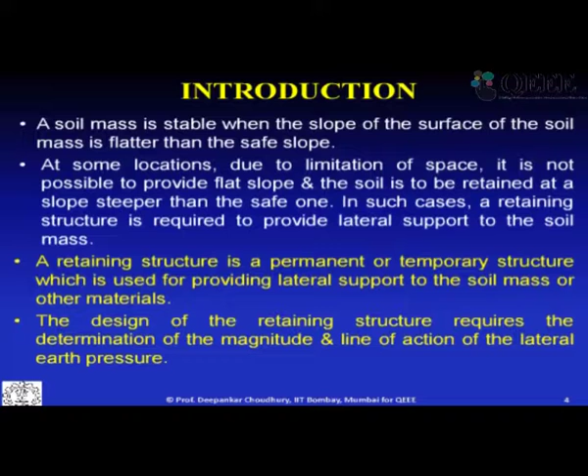Whenever we get a soil mass below the ground, we say that it is stable when the slope of the surface of the soil mass is flatter or shallower than the safe slope of that soil mass. Suppose an existing ground profile, which I am showing now - this is a profile of a ground, this is any depth below the ground, and this is a very shallow slope which I have drawn. Obviously this is a stable profile. Whereas this profile of ground may not be that stable because it is very steep compared to its horizontal inclination.

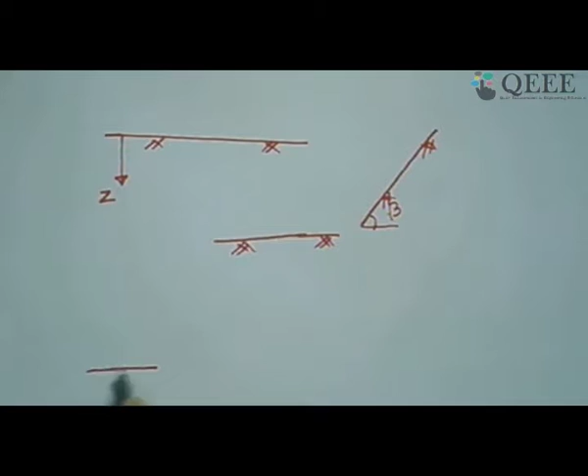So whenever we want to have some kind of level difference in the ground - suppose my ground surface at one side is like this and another side is like this - what we can achieve by means of a slope like this, but this slope has to be stable. This inclination which maintains the two different levels of ground surface has to be stable, provided this angle of inclination is very shallow, or considering the soil properties.

But due to the limitation of available space, in many cases, mainly in urban areas where there is a severe space crunch, we cannot have this much extra space. This is nothing but what we require - an additional space to have the stability of this inclination.

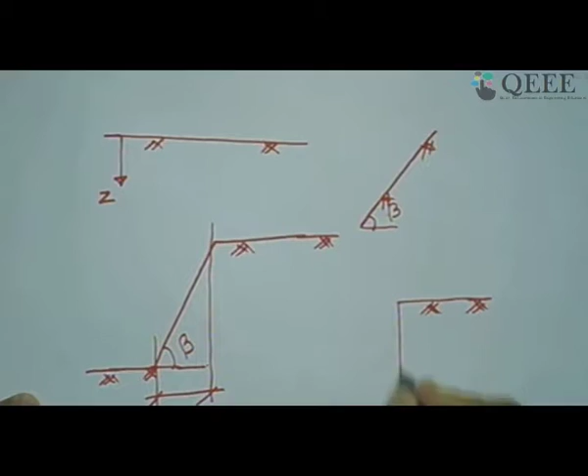So what we can suggest in such a case - suppose we want to maintain the same level height where there is a severe space crunch - to maintain this kind of two level difference of ground surface, we need to provide some kind of supporting system here which maintains the stability of this kind of level difference adjacent to each other. So this is nothing but what we call a retaining structure.

This kind of construction can be of masonry, concrete, or any kind of rigid material. This kind of structure which provides support to maintain a level difference of ground is nothing other than what we can call a retaining structure.

Coming back to this slide, you can see that at some locations, due to limitation of space, it is not possible to provide that flat slope - whatever horizontal extra distance you require is not able to be available or provided at the site. So in such cases, a retaining structure is essential to construct to provide lateral support to that soil mass.

So that is what I have shown just now. A retaining structure can either be a permanent structure to maintain that level difference forever, or it can be a temporary structure - that is, for some temporary reason we want to maintain a level difference, and once the work is done we can probably reduce the level difference, so then the need for the retaining structure is not there. In that case we can call them temporary structures.

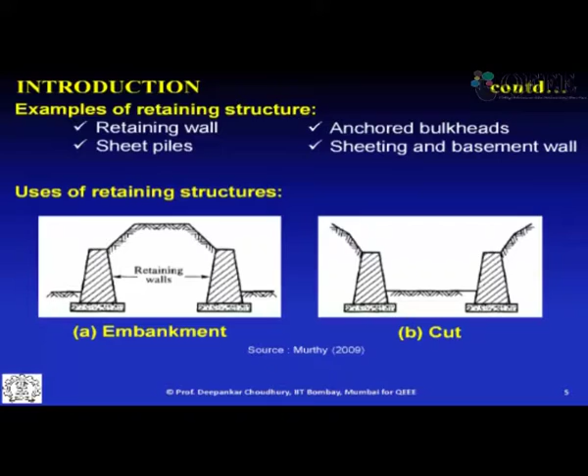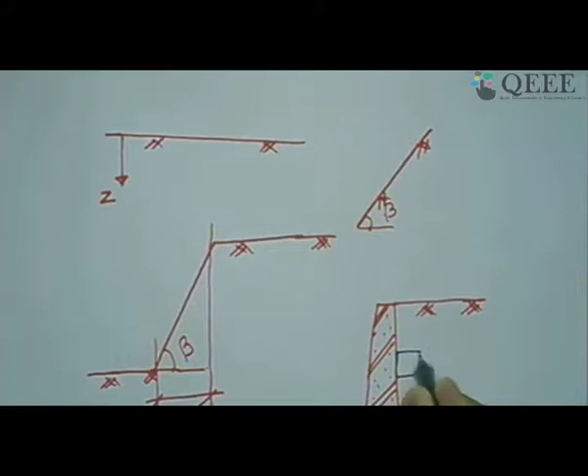Let's see this in the document camera. As I drew earlier, for the lateral earth pressure, if we take any particular soil mass at a depth Z from the ground surface, there is a vertical stress acting on this soil mass, assuming these are principal planes, and some stress in the lateral direction — a horizontal stress, sigma h. This sigma h acts on the soil mass to maintain equilibrium, and in turn acts on the wall, giving a lateral pressure to the wall.

So for this soil mass, taking this soil element, we understand how this causes the lateral earth pressure. Now let's see the different types of lateral earth pressure, this sigma h, depending on the movement of the wall. There are three different types of lateral earth pressure.

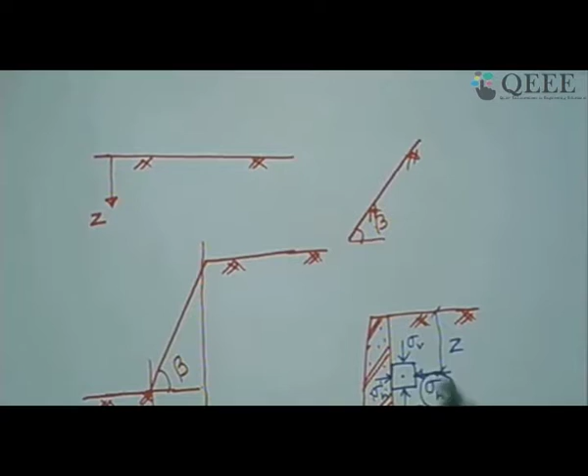One essential comment I would like to maintain here: I am talking about a soil element. So this sigma h, the lateral stress or horizontal principal stress, is because of the soil material, not due to water or any other thing. Whenever we use the terminology earth pressure, we must be sure it is the pressure exerted by the earth or soil, not the water pressure if water is present. In case of dry soil, the total pressure equals earth pressure. But if it is moist soil or the water table is within this layer, the total pressure will be a combination of earth pressure plus water pressure.

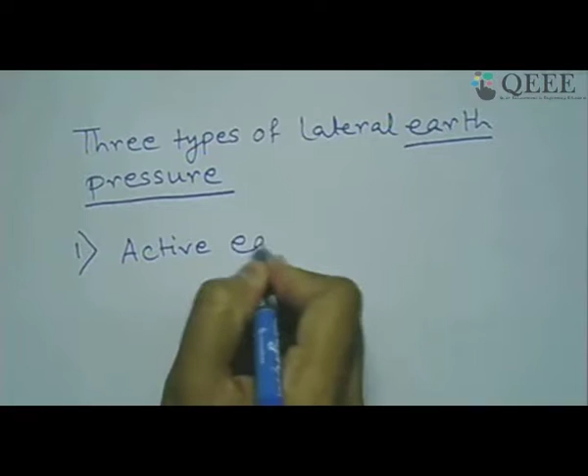So what are the three types of lateral earth pressure? Let us write these down: active earth pressure, the second type is called passive earth pressure. For the case of passive, we also use another nomenclature known as passive earth resistance, I will come to that in a little while. Actually, resistance is a better terminology to use than pressure for the passive earth condition. And the third type of lateral earth pressure is none other than at rest.

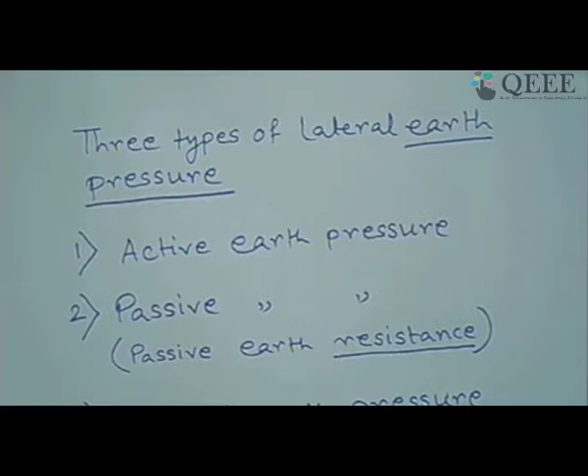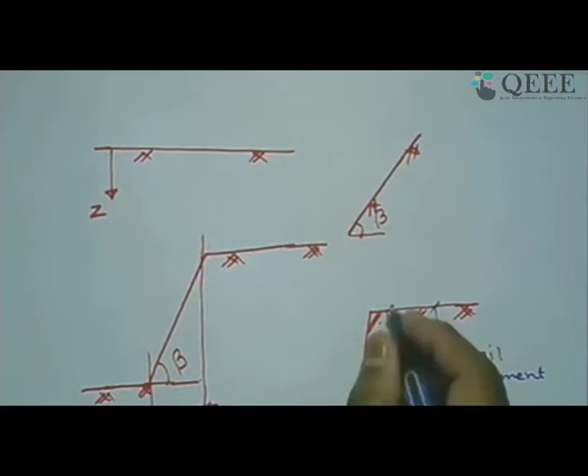So, at rest earth pressure. Now if we start understanding where these different types of earth pressure come from, the term 'at rest' automatically tells us what type of earth pressure it can be. It says the wall is not moving, it is at rest condition, meaning there is no movement, no deflection, no further lateral or rotational movement of this wall. Because of that, whatever lateral stress is coming here is nothing but earth pressure at rest, since the wall is at rest condition.

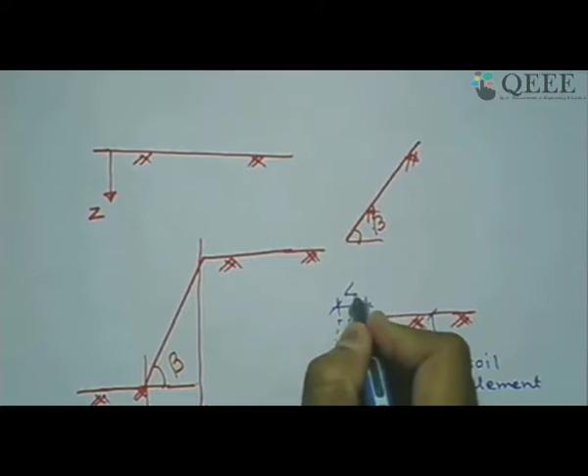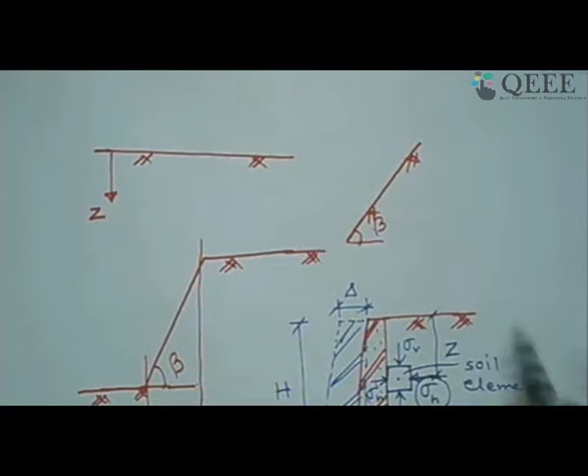Now what is active? How does that active condition come about? Active earth pressure is nothing but, due to this level difference, this side of the earth exerting pressure on the wall. So there is every possibility that the wall may shift towards this side. This is the displaced position, and that deflection or movement, let us say delta. If we say the level difference between the two ground surfaces is capital H, which is also called the height of the wall, then the value of delta by H is very important to know which type of lateral pressure is acting on the wall. As shown, the soil is exerting pressure on the wall, hence it has moved in this direction. This soil is called backfill.

So this condition, where the movement of the wall is in the direction away from the backfill soil, that is called the active state of earth pressure.

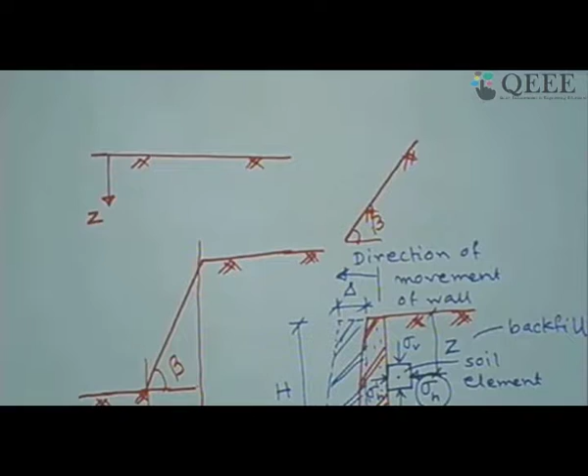Now, if we want to know the fundamental assumptions of any earth pressure theory in general, as in most geotechnical problems, some assumptions are always valid. Here as well, it is true for the theory of earth pressure: soil mass is considered semi-infinite, homogeneous, isotropic, dry, and cohesionless. The classical earth pressure theories of Coulomb and Rankine were proposed for cohesionless soil, mostly sandy backfill material, and for dry conditions. Later these were extended for general cohesive soil also, and moist conditions, but these are the fundamental first assumptions in these theories.

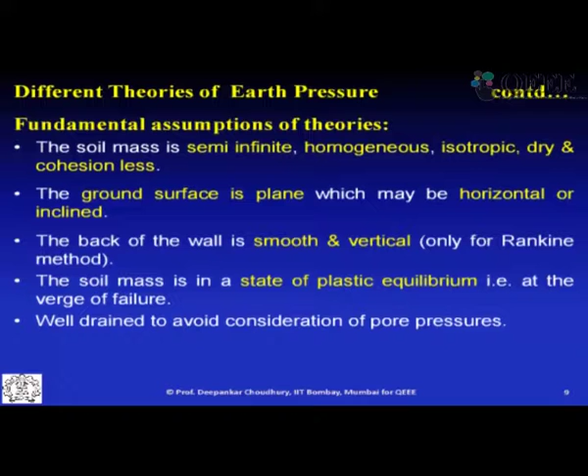As I have already mentioned, there are three different types of earth pressure: at-rest condition of earth pressure is when a retaining wall with a plain vertical face is backfilled with cohesionless soil, and if the wall does not move even after filling the material, then whatever pressure the soil exerts on the wall is known as the at-rest earth pressure acting on the wall.

Whereas for the active state of pressure, if the wall is gradually rotated or moves away from the backfill soil, then the unit pressure acting on the wall gradually gets reduced. So in the active state of earth pressure, the pressure the soil initially gives on the wall slowly gets reduced. Why does it get reduced? It is quite obvious from the picture shown earlier.

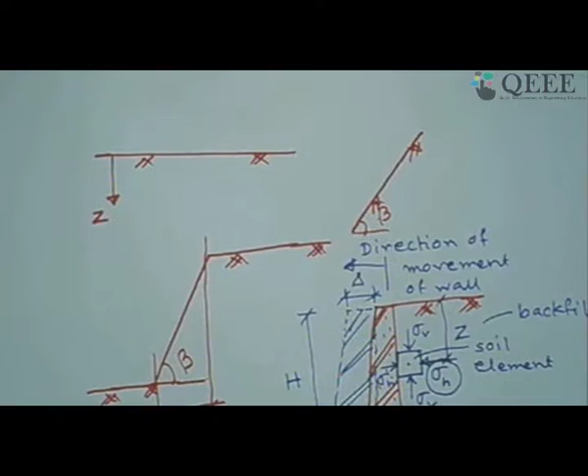You can see, initially when the wall was at this position shown in red, the soil laterally was giving a certain amount of pressure. Now when, due to that pressure, the wall has moved away from the backfill soil, then to maintain equilibrium this pressure slowly reduces till it reaches its verge of failure state, or the plastic state, which we have termed the active state.

Whereas for passive earth pressure, we should more correctly call it passive earth resistance. This is the situation, already explained, when the wall moves out from the backfill side — it can be lateral, rotational, or a combination of these two — and it reduces the lateral pressure, subsequently reaching a minimum possible value acting on the wall, which is our active state of earth pressure.

But in some cases, the wall moves towards the backfill — now the wall is putting extra pressure on the soil. It can again be rotation, lateral deformation, or a combination of these two. In that case, whatever pressure is coming from the soil side, we call passive earth pressure, or better, passive earth resistance, because this is the resistance provided by the soil to the wall. That's why passive earth resistance is a better terminology.

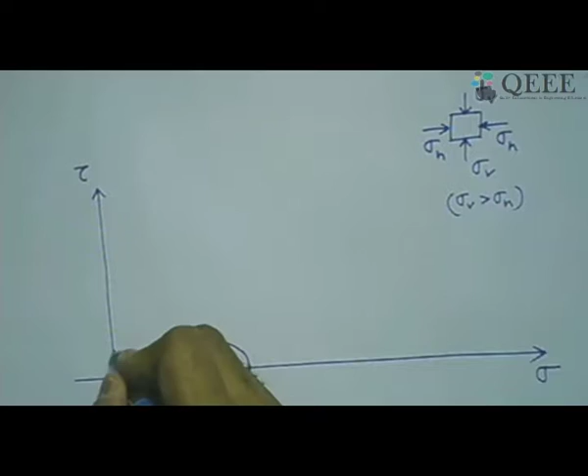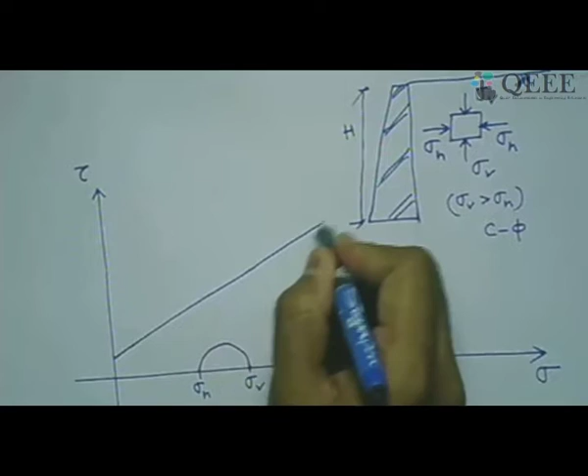Remember, if it is a C-phi soil, that is if the soil media below the ground surface, for this height of wall, if there is no movement of the wall, I can draw this sigma v and sigma h, and if this is a C-phi soil, meaning cohesive and frictional soil, then the Mohr-Coulomb failure envelope I can draw like this, which is C and phi, as we all know.

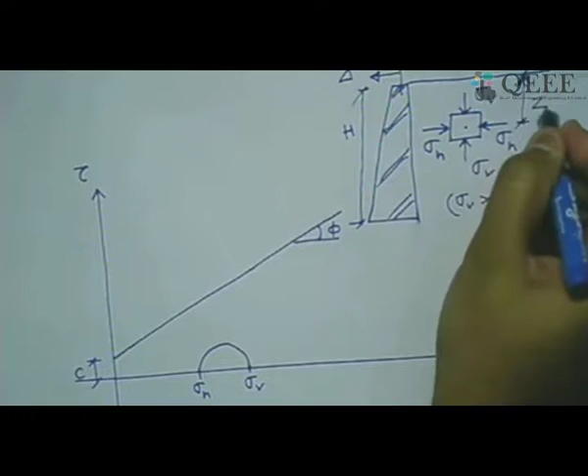So what will happen in this case? Now the wall started moving away, in this direction by some delta amount. So this sigma h has to reduce because you are releasing the pressure by movement of the wall. But sigma v, is there any change to that? No, because this is vertical stress at any depth z, that remains unaltered. There is no change in the value of sigma v. So this point remains same, but sigma h keeps on reducing as the wall moves away from the backfill.

So because of that, if we keep drawing the various states, till which value can this sigma h reduce? Until it touches this Mohr-Coulomb failure envelope. That means when it touches this one, whatever value we get here for sigma h, that is nothing but our active state of earth pressure.

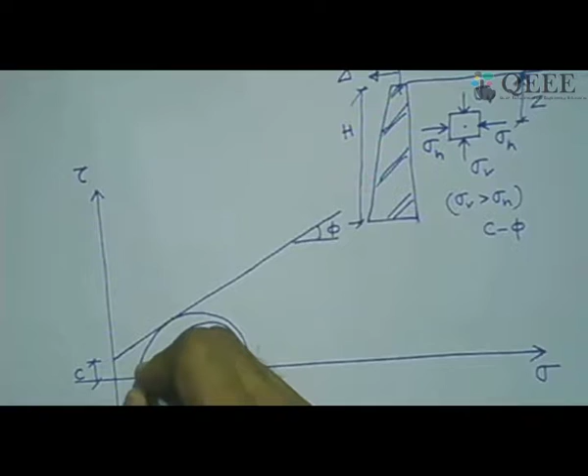So I can mention it as sigma a. That is nothing but what we have mentioned as it goes to the plastic state of equilibrium. So this is my active state of earth pressure, the lateral pressure, and this is my vertical stress. Now for this active state, if I want to find out the inclination of the failure plane with respect to the various directions, what will we get?

So this point on the failure envelope I can connect with these two ends. Whatever is the angle here, that will essentially give me the inclination of the failure plane with respect to the horizontal. Why will it give me that? Because as we all know from the concept of Mohr circle, first we have to identify the pole of the Mohr circle. Then any change of stress, finding the direction, planes, everything should be with respect to the pole.

So if we want to find out the pole for this active state, let's see how to find it. Sigma v is acting on a horizontal plane, so we should draw a horizontal line through sigma v, and sigma h is acting on a vertical plane, so we should draw a vertical line for that sigma h. Wherever these two planes meet, that is nothing but the pole of the Mohr circle. In this case, this point A is our pole.

So that's why if you find the angle alpha from this pole with respect to the failure envelope, with respect to horizontal, that alpha value gives us the inclination of the failure plane. Now how much is the value of this alpha? I will calculate that a little later.

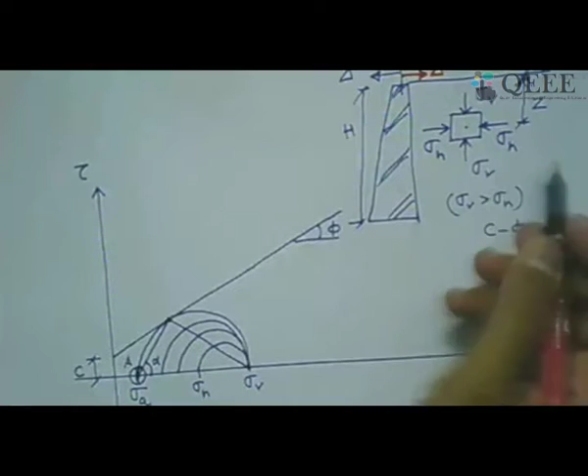Now let us understand the other state of movement of the wall. In the second state, suppose the wall starts moving in this direction, that is, the wall is going towards the backfill soil - now I'm using red color. What is happening? Your lateral stress keeps on increasing because the wall is pushing towards the soil. But again, there is no change in the vertical stress.

So sigma V remains constant, but sigma H keeps on increasing, from the at-rest condition, and then it increases and goes to the other side, because sigma H now increases over sigma V. Until which time can it increase? It can increase until this Mohr circle also touches the failure envelope. So when it touches the failure envelope over here, that gives us the plastic state, and that point we can term as sigma P, the lateral pressure at passive state or passive condition.

Now if we connect this point with respect to this and with respect to this, we will get the inclination here. Let us say this is beta.

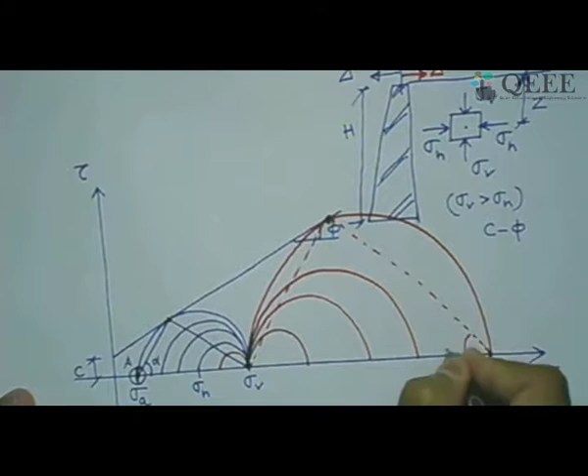This beta inclination with respect to horizontal gives me the inclination of the failure plane, because these are nothing but failure planes. It only depends on which direction you are taking.

Now for this second set of Mohr circle for the passive state, if we want to find the pole, it's important because that gives us the direction of which plane to consider. Sigma V acts on the horizontal plane, and sigma P, the lateral stress, acts on a vertical plane. So we draw a vertical line and a horizontal line, and wherever they meet is the pole. In this case, pole B is for the state of passive earth pressure. So this is the simple Mohr circle.

This explains how the active state and passive state of earth pressure at plastic equilibrium condition, or at the verge of failure, get formed due to the movement of the wall away from or towards the backfill.

Now coming back to the angle of inclination alpha and beta, for the sake of completeness: alpha equals 45 degrees plus phi by 2, which is the inclination for the active case, whereas for the passive case the angle beta is 45 degrees minus phi by 2. If we take this plane and plot it according to the stress plane directions, let us draw it on the next page to understand it further through the concept of stresses.

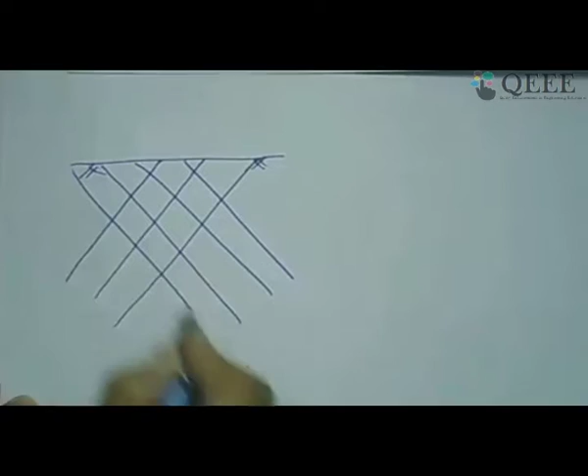For the active state, we already obtained the inclination of the failure planes, which are parallel to each other, as this is valid for any soil element. So for any number of soil elements, the same parallel planes can be drawn. These are a set of parallel planes inclined with respect to horizontal at an angle of 45 degrees plus phi by 2. This is called the inclination of the failure plane for the active state of earth pressure.

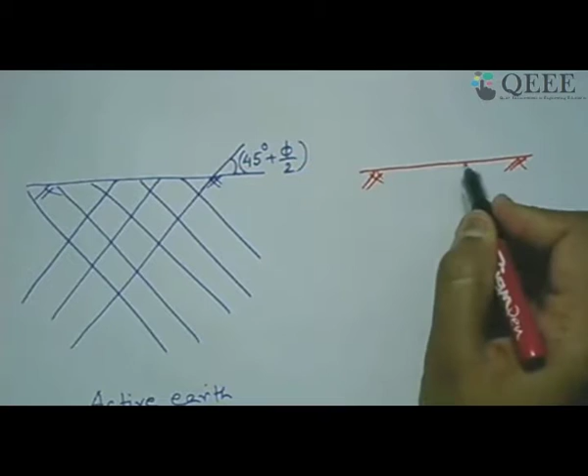For the other case, if I draw the same failure pattern, what do we get for the passive case? In this case, the inclination of the failure plane will be flatter than what we got in the active state, with the angle with respect to horizontal as 45 degrees minus phi by 2. So this is for the passive earth pressure condition.

Now with respect to horizontal, we have seen this from the Mohr circle. In the active state, 45 plus phi by 2 is the inclination of the failure plane, because this is the pole, whereas for the passive state this is the pole. So the inclination of the failure plane with respect to horizontal is 45 minus phi by 2. Now if we want to generalize this, or remember only one single thing...

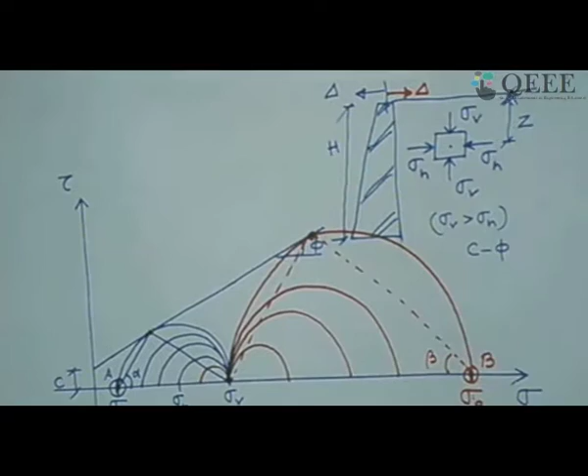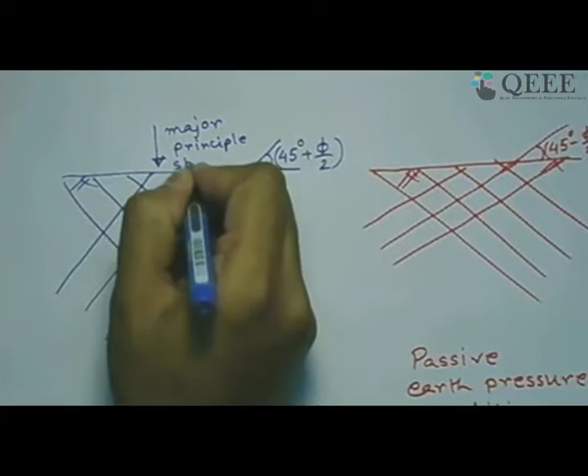For the active state, what is our major principal stress direction? This vertical stress direction is our major principal stress direction.

Whereas for the passive condition, the major principal stress direction is in this lateral direction. So what happens in this case? The major principal stress direction—but which is the major principal plane? The major principal plane is this lateral one, on which the major principal stress is acting.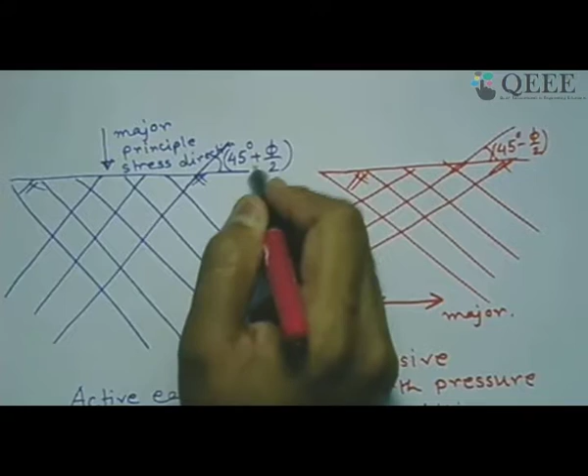So 45 plus phi by 2 is always the angle of the failure plane with respect to the major principal plane. In the active case, this is our major principal plane, and in the passive case, the major principal plane is the vertical one, because the lateral pressure acts on the vertical axis.

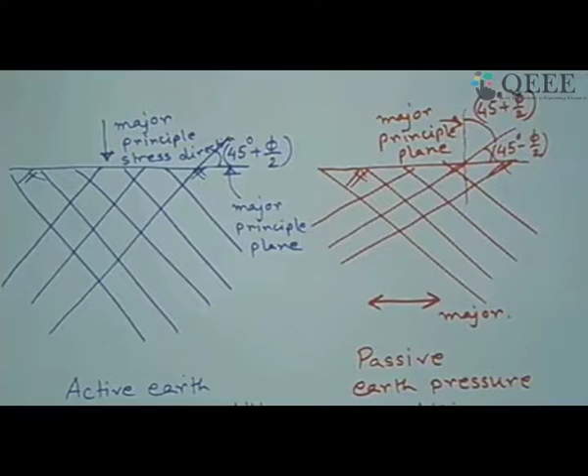So the vertical plane is nothing but our major principal plane. With respect to the major principal plane, what is the angle? This is the same as 45 plus phi by 2. So in generalization, we can always say that the inclination of the failure plane is at an angle of 45 plus phi by 2 with respect to the principal plane. So if we remember whichever is our major principal plane, with respect to that, always our failure plane is inclined at an angle of 45 plus phi by 2, whether it is active state or passive state.

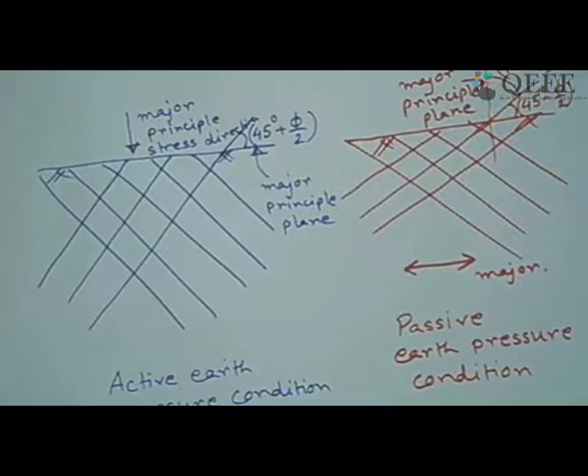That way we will never forget whether it is active condition or passive condition, because we know the major principal stress and major principal plane are different in both the cases.

For active state we have seen that from at-rest pressure, when there is no movement of the wall, pressure is at rest, which we generally denote as P naught condition, or the corresponding earth pressure coefficient as K naught. So when we move away from the backfill, the lateral pressure keeps on reducing, finally going to the plastic state at the verge of equilibrium, and that minimum value we call the active state. You need this much movement of the wall, delta A, which is necessary to form this full active state condition on the wall.

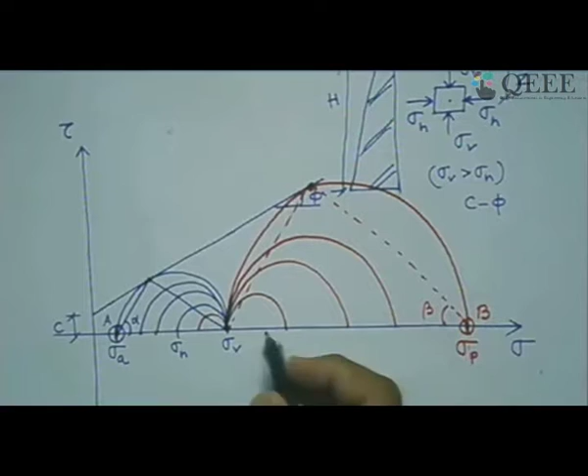Similarly, for the other side of wall movement, when the wall moves towards the backfill side, there is an increase in the lateral stress, and that also requires a certain amount of movement of the wall. Finally, as long as it reaches the verge of failure condition when it touches over here, that condition we call fully passive condition of earth pressure. So in between, whatever values you get at these locations, these are none other than partially mobilized passive earth pressure - not complete passive earth pressure. You need a certain amount of movement.

So in this case we say delta A is the required minimum wall movement to get the complete active state. In this case we say delta P is the required amount of wall movement to get the fully passive condition. If your delta value is less than delta P, it will be partially passive, and if your delta value is less than delta A, that will be called partially active earth pressure. So these are in between.

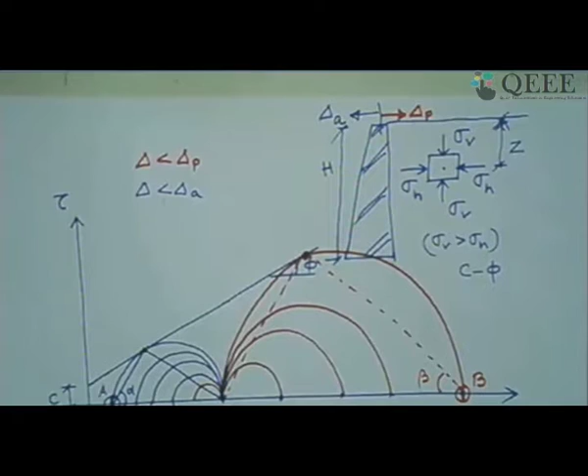Now if we look at this slide, it shows all this portion of the curve, these are the various states of partially mobilized active earth pressure shown here. These are various locations where partial passive earth pressure is there. When it reaches the minimum required delta P value, or the displacement required by the wall, then it reaches the full passive condition, and that is our passive pressure or passive resistance, P suffix P. And here, when it reaches the plastic state of equilibrium after a movement of delta A, we call this PA, that is P suffix A, or the active state of earth pressure.

So active state of earth pressure is the minimum among all these three pressures - earth pressure at rest, passive earth pressure, and active earth pressure. Among these three states, active state is the lowest value of earth pressure that can act on a wall. So as designers of civil engineering, if we want to design any wall, we actually want to design it as active state.

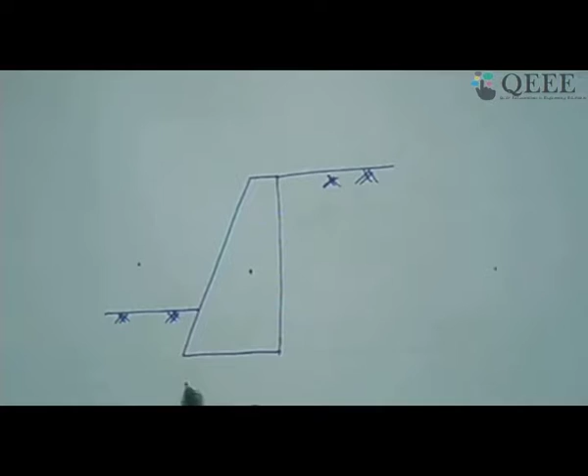Why does this concept arise? Let me explain through this. Essentially, when we try to design a wall - let's say this is the rigid retaining wall we want to design to maintain the level difference of ground on two sides - obviously this is the typical embedment depth of the wall you must provide for stability. This is the height of the wall. Now, if your wall tends to move in this direction, or you allow it, this is quite obvious because the soil on this side, due to level difference, will put a thrust on it.

So we have active state of earth pressure from this side, because the wall is moving away from the backfill. But for this backfill, what happens? The wall is moving towards the soil, so on this side of the wall it will be passive state of earth pressure. So in design, if we want to optimize or economize, the best way is to take the resultant, PA minus PP, which we call P resultant. We design for this resultant lateral thrust and provide the section, reinforcement, everything accordingly.

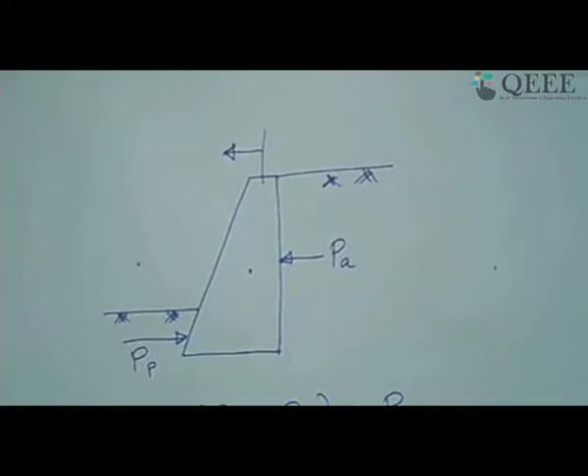But as we have already mentioned, the amount of delta required for active state to form completely is very small compared to the value of delta P required for passive state to form. That's why if you deduct the full passive pressure, you will be making a gross mistake in your calculation. It should only be some fraction or percentage of total passive pressure that you deduct, and how much that percentage is, is not known completely. So in many design cases, people don't use this deduction of passive earth pressure at all - we only design for the active state of earth pressure, not for the resultant pressure.

Now if we move back to the slide, you can see it shows clearly that theoretically we should design for PA minus a small percentage of PP. But if we do PA minus fully mobilized PP, we make an unsafe design, and if we only consider PA it's uneconomic. It is better to be safe using only PA rather than deducting a small percentage, unless we are sure that much percentage of PP has been mobilized from the other side of the wall.

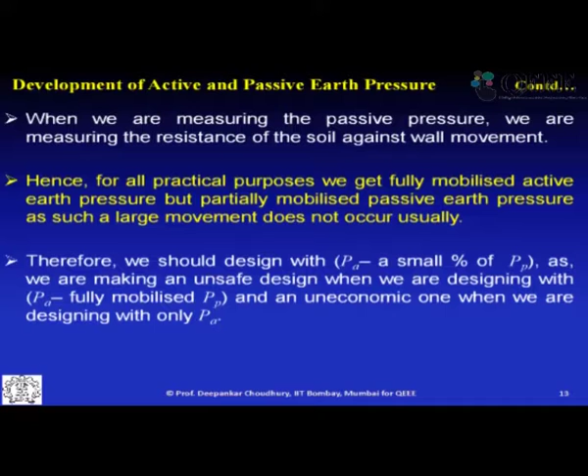Now what are these amounts of movement of the wall? If we see, we will appreciate it much more. To get fully mobilized active and passive states, the amount of wall movement necessary is of this order - delta A required is about 0.1 to 0.4% of the height of the wall, which is very, very small. That's why at the field we can easily achieve the state of active earth pressure condition, which is good for us.

Active state of earth pressure is minimum among all the pressures, and delta P, which is required to mobilize full passive earth pressure, is about 5 to 10% of the height of the wall - much higher than the wall movement necessary for active state. So for this amount of wall movement, in the previous problem I was showing, if you consider the full passive earth pressure, we will make a mistake.

If we consider the corresponding partially mobilized passive earth pressure due to this movement, then also it can be questioned, depending on the scouring effect and many other things at the bottom portion of the ground surface. That's why we don't consider it at all in most cases for conventional, or rigid, retaining wall design. But if we design a flexible wall, etc., we will consider this value - we will see that later on.

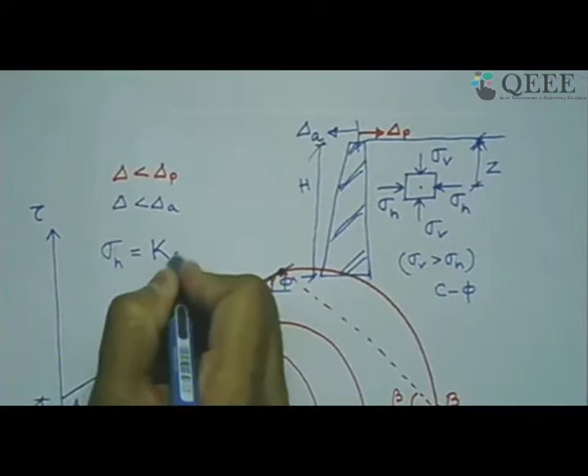Now at rest pressure, the sigma h lateral pressure can be expressed as some constant K naught, or coefficient of earth pressure at rest, times sigma v. Where does this come from? If we go back to the document camera, you can see the relationship between sigma v and sigma h - we can always mention that sigma h is some coefficient k times sigma v. This k is called the coefficient of lateral earth pressure. We use three different symbols for three different states of earth pressure - what are those?

So the slide where I was mentioning the three types of earth pressure, now let me denote them.

Total active earth pressure we denote by the symbol PA, P suffix A, and the corresponding coefficient of lateral active earth pressure we denote generally by Ka. For the passive case, we mention it by the symbol PP, that is total passive resistance, and the corresponding coefficient of passive earth resistance we denote as Kp.

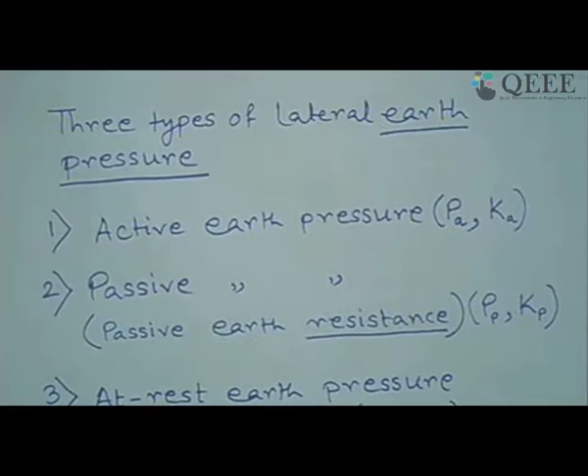And at rest we use the symbol P naught, because there is no movement of the wall, and the corresponding lateral earth pressure coefficient, the earth pressure coefficient at rest, is K naught. So this K naught condition is nothing but at rest movement of the wall.

Now coming back to the slide, you can see if the wall is rigid and does not move with the pressure exerted on it, the soil behind the wall will be in the state of elastic equilibrium, because it has not reached the verge of failure, or the plastic state. It has not touched the Mohr Coulomb failure envelope.

So that's why it will be under the condition of elastic state of force equilibrium, and because of that we have to establish the relationship or equation we will get for the coefficient of lateral earth pressure at rest K naught for this kind of situation.

So if we consider the backfill soil is homogeneous with both sigma h and sigma v increasing linearly with depth, then the ratio remains constant, that is sigma h by sigma v is always sigma h by gamma z if you don't have any surcharge or other thing. That denotes K naught, where K naught is the coefficient of earth pressure at rest.

So lateral earth pressure can be mentioned as sigma h equals K naught times sigma v. If there is no surcharge acting on the ground, then sigma v is nothing but gamma times z. So what will be the total pressure acting on the wall? That is earth pressure at rest, P naught is half K naught gamma h square.

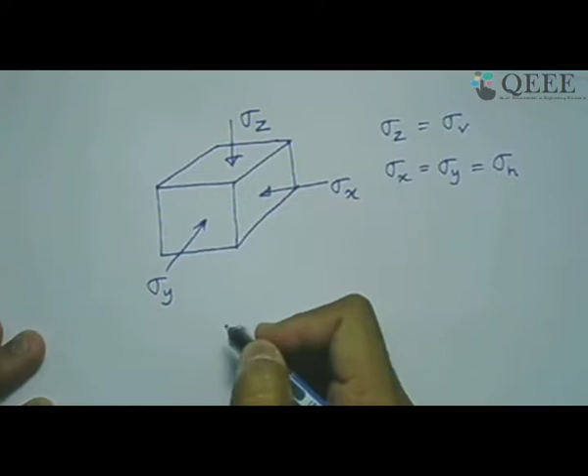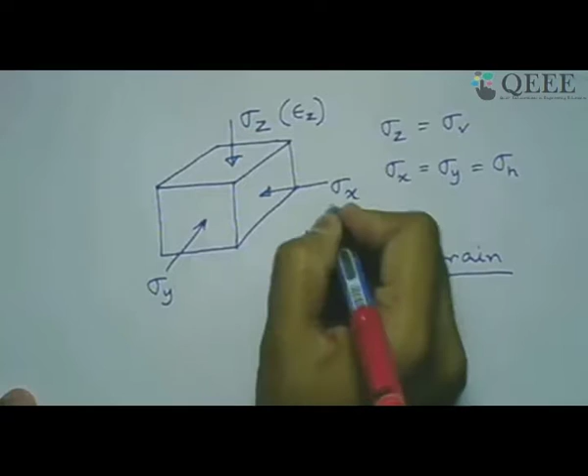Now for this, what we have mentioned at rest condition of earth pressure, so at rest means there is no lateral strain, because that is the condition defined by at rest, there is no lateral movement. If these are the stress directions, the corresponding strains are epsilon z, the strain in vertical direction, epsilon x, strain in x direction, and epsilon y, strain in y direction. So no lateral strain means our epsilon x and epsilon y should be equal to 0, but epsilon z obviously will exist because it is not 0.

So if it is so, we can write sigma x equals sigma y, which is our sigma h, that we have already defined as k naught times sigma z or k naught times sigma v, as we have seen already. Now if we apply the theory of elasticity, we can write down epsilon x, the strain in x direction.

Epsilon x can be written as 1 by E times sigma x minus mu times sigma y plus sigma z. This we already know from solid mechanics or theory of elasticity, that strain in x direction can be expressed like this, where E is the modulus of elasticity and mu is the Poisson's ratio of the soil. Because it is in the state of elastic equilibrium, we can always consider this condition.

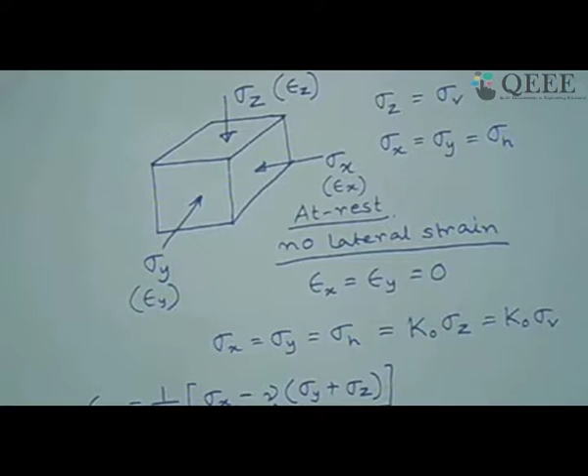Now what are the values of other strain directions, that is epsilon y and epsilon z? In the same way we can write epsilon y is given by 1 by E times sigma y minus mu times sigma x plus sigma z, and the z direction strain epsilon z will be written as 1 by E times sigma z minus mu times sigma x plus sigma y.

Now what we have seen is that epsilon x equals 0 as well as epsilon y, because there is no lateral strain. So if you apply this in the first equation itself, setting it equal to 0, what do we get? You can get sigma x equals mu times sigma y plus sigma z. So this gives us sigma x equals mu times sigma y plus sigma z. Now if we use that further, what we can write...

That k naught times sigma z is equals to mu times k naught sigma z plus sigma z. How can we write this from the previous equation? That means sigma x equals mu times sigma y plus sigma z, because we know sigma x is nothing but k naught times sigma z, and sigma y is also nothing but k naught times sigma z. So this we can write.

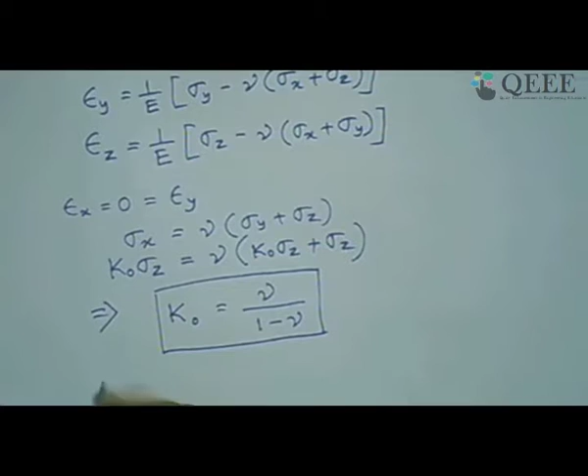But remember, it is valid only for elastic material and for NC soil, that is normally consolidated soil. The value of mu is always less than 0.5 for soil, as we all know. So we will get a value of K naught which will always be less than 1, because as mu is less than 0.5, K naught will always be less than 1.

So if it is water or very soft saturated clay where mu approaches 0.5, what will we get? That gives us K naught equals 1 when mu equals 0.5. So essentially it says that lateral pressure given by water is the same as vertical pressure, because sigma h is k naught times sigma v. So water gives equal pressure all around. This is another way of looking at it - from this concept we can say that pressure in water all around is the same, because K naught, that lateral coefficient, is 1 for the case of water.

But if it is normally consolidated soil, then only this situation of K naught less than 1 occurs. If water is present, then K naught equals 1 has to be taken care of. But if it is over consolidated soil, in that case K naught can be more than 1 also. So where this K naught can be more than 1, let us write down here - for OC soil, that means over consolidated soil, which was earlier subjected to higher load or stress level.

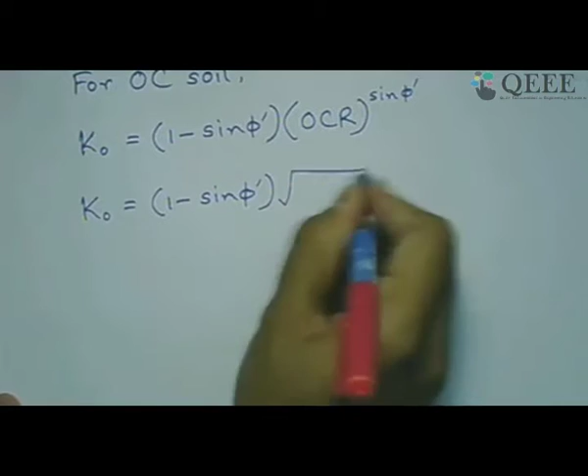Another expression for K naught is 1 minus sine phi dash, where phi dash is the soil friction angle in drained condition, or effective soil friction angle, root over OCR. This equation is given by Meyerhof, mostly used in field or practice, proposed around 1976. This is the equation for over consolidated soil.

So in all such cases, K naught can be greater than 1, even much greater than 1, depending on the value of over consolidation ratio.

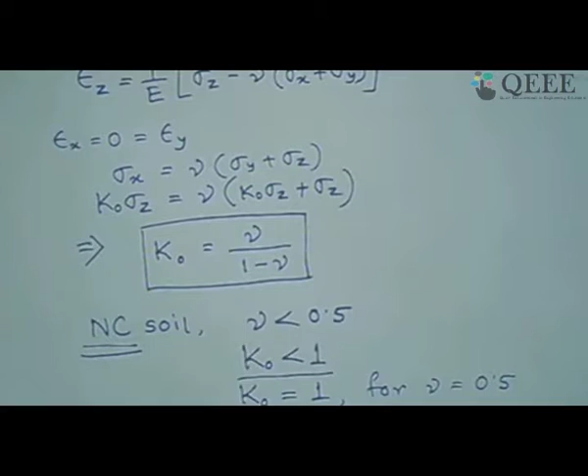Now there is another conventional equation other than this theory of elasticity to obtain K naught. K naught is given by 1 minus sine phi dash, known as Jaky's equation. Jaky gave this equation for obtaining K naught, but this is for NC soil. To repeat, Jaky's equation is valid for normally consolidated soil, or you can use theory of elasticity also, but for over consolidated soil you have to use Meyerhof's equation or Kulhawy's equation.

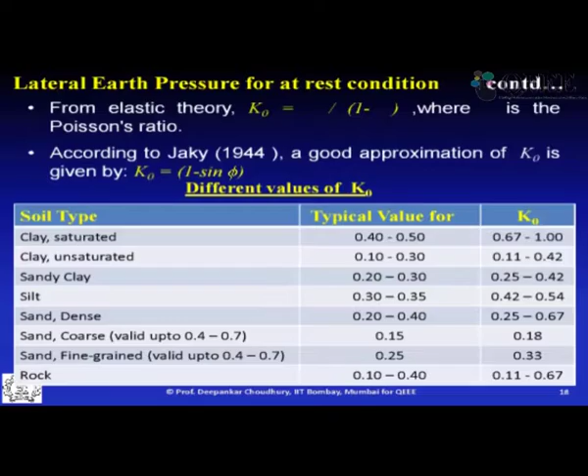Now let us come back to the slide. From elastic theory, K naught is mu by 1 minus mu, where mu is the Poisson's ratio, and according to Jaky, a good approximation gives K naught equals 1 minus sine phi. All these are for only normally consolidated soil, so these are various values of K naught, all less than 1, for normally consolidated soil. Now let us again discuss in detail the active and passive state of earth pressures.

Let us now first start with the conventional theory for earth pressure, that is Rankine's theory. In the Rankine theory, the assumptions are: there is no wall friction angle, meaning the wall is considered smooth, since the back face of the wall connecting to the backfill soil is smooth there is no friction. Wall friction is denoted by the symbol delta, which is 0, and the wall is considered vertical. That is Rankine's first assumption.

Then the ground and failure surface are straight planes. We have derived that the failure plane is straight, at slip planes or failure planes at 45 plus phi by 2, always with respect to the major principal plane direction. The resultant force acts parallel to the backfill slope, and soil is homogeneous and isotropic.

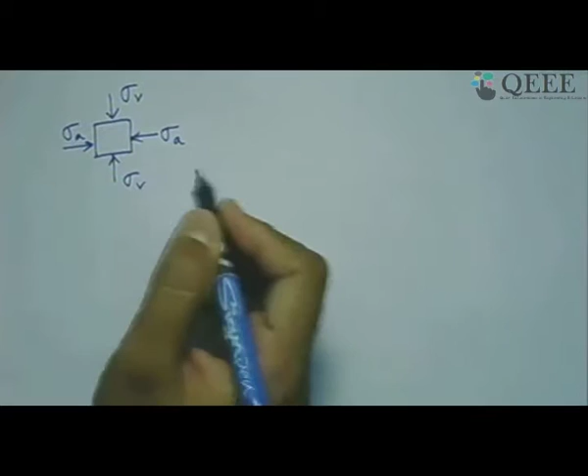Coming back to the concept of major and minor principal stress, for the soil element in active state we have sigma V here, sigma V here, and sigma A here. Now which one is major principal stress and which one is minor principal stress? This sigma V direction is our major principal stress, sigma A is our minor principal stress, as we have already seen.

So based on that, the relationship between major principal stress and minor principal stress is given by Mohr circle theory, and from that we can write sigma 1 equals sigma 3 times n phi plus 2c root over n phi. This is from the concept of Mohr circle, which we know from our solid mechanics course, the relationship between major and minor principal stress when cohesion is present.

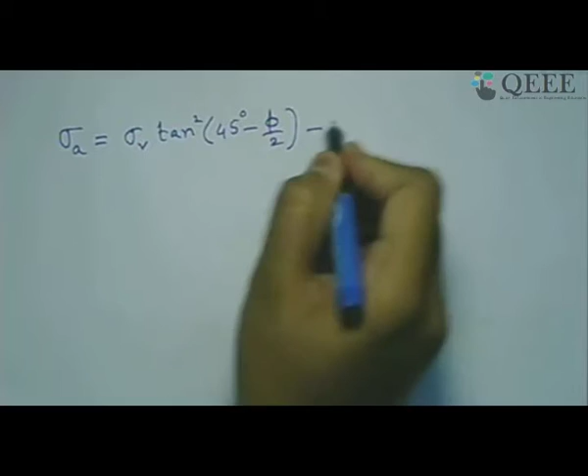Now if we have a C-phi soil, what will we get? In that case we can write sigma A at active state as sigma V times tan square of 45 minus phi by 2, minus 2c tan of 45 minus phi by 2.

Where did we get this from? Again, it is from our basic concept of major and minor principal stress relation that I have already derived. I did it first for the C equals 0 case, but if C is non-zero, then this additional term is present.

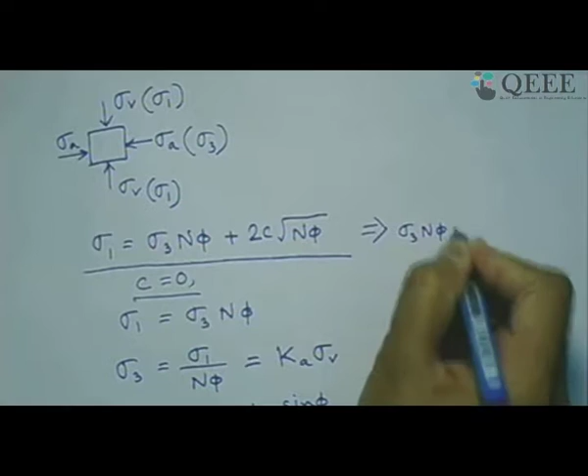Now if you want to find out sigma 3 from this, that's what I did: sigma 3 times n phi will be sigma 1 minus 2c root n phi, or sigma 3 equals sigma 1 by n phi minus 2c by root over n phi.

That's what we did, and the same thing we had written earlier, which comes out to be sigma A, which is sigma 3 for the case of active earth pressure, and sigma V, which is nothing but sigma 1, with this being 1 by n phi, and this being 1 by root of n phi.

So this is the expression for active earth pressure at any depth Z, because sigma V, when there is no surcharge acting on the ground surface, can be written as gamma Z, and what I called this symbol is Ka. So I can write it as Ka gamma Z.

This gamma Z is sigma V, minus 2c root Ka, because this is nothing but root of Ka, as we have seen. Therefore, the active state of earth pressure at any depth can be computed by this expression.

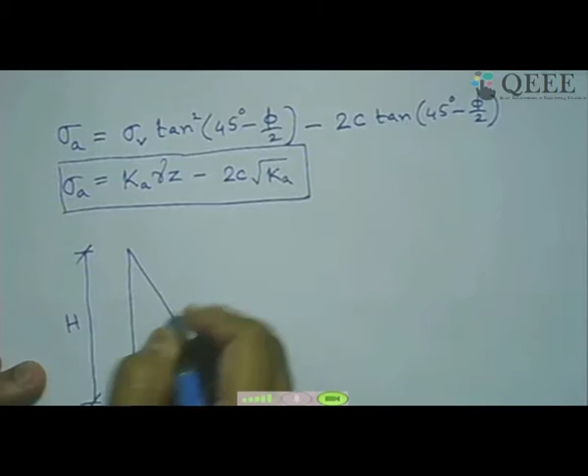If it is so, we can draw the distribution of this active state of earth pressure at any depth like this. So this component is for, this is Ka gamma H if we have the height of the wall as H. So at any depth Z, the value of the intensity will be Ka gamma Z. This is the component I am drawing first.

Now what about this one? I have to sum it up, but as a negative. So this is positive pressure, this is negative pressure component, which is constant throughout — you can see this is not a variable of Z with respect to depth. So this is 2c root of Ka.

And if you combine these two, what do we get finally? So the resultant active earth pressure distribution at any depth will be something like this.

So this is our positive side, this is our negative side, because here it is negative, here it is 0. So obviously we will get here 2c root of Ka, and if we draw this imaginary line, here to here is essentially our Ka gamma h. So essentially this positive value which you are getting is Ka gamma h minus this 2c root over Ka.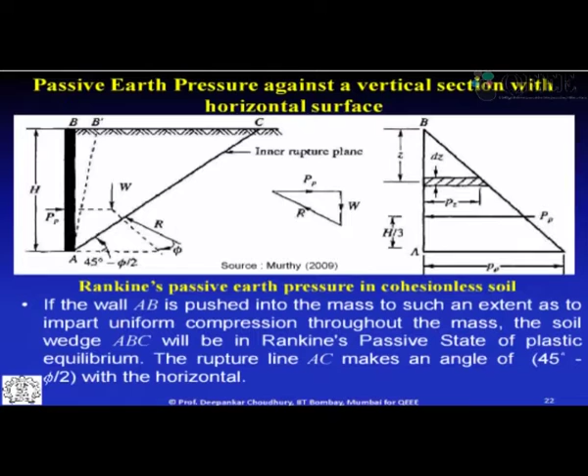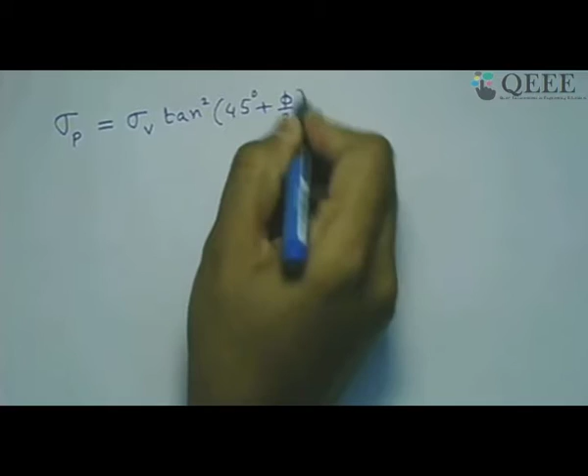Let us now switch to this camera. So for the case of passive condition, sigma P, what happens? Sigma P is equals to, again I can write sigma V tan square 45 plus phi by 2 plus 2c tan 45 plus phi by 2.

Now where from I got this equation? Again, if I take you back to the classical theory of mechanics, let us refer to this same equation, that is the relationship between major and minor principal stress. So here we have seen that sigma 1 and sigma 3 relationship is like this. Now for passive condition, who is sigma 1, major principal stress? That is the passive stress or the lateral stress, whereas sigma 3 or minor principal stress is nothing but the vertical one. So in this case, this formula directly we can use. So that's why sigma 1 is our sigma P here, and sigma 3 is our sigma V, and this is the rest of the thing.

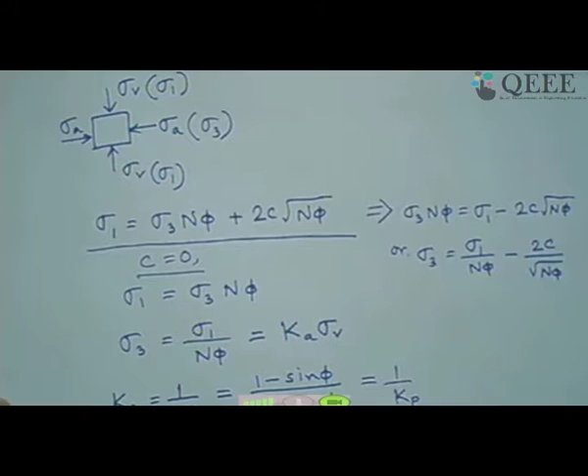So this is nothing but our Kp. So you can see Kp and Ka, they are inversely proportional. You can see it directly from here. So this is equals to 1 by Kp. That is, active earth pressure coefficient and passive earth pressure coefficient are related like this. So Kp is equals to tan square 45 plus phi by 2.

Now what should be the distribution in this case? If we want to draw the expression for sigma P or passive resistance or passive pressure at any height, the first one will be the triangular distribution. So this one is the triangular distribution. Here we will have the value of Kp gamma h when h is the height of the wall. So at any depth of z, this value will be Kp gamma z.

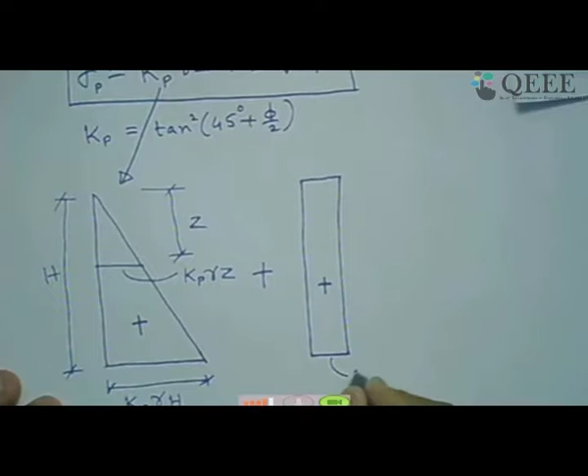So that you can calculate from here, plus this component which is not varying with respect to depth. So this is a constant, not varying with respect to depth. If I say this is positive, this also positive here, unlike active case. In active case this was negative, but here it is positive. And how much is the value over here? This one is 2c root of Kp. So what is the net pressure acting on the wall? That is summation of these two. So this is this component. So the total pressure on the wall is acting like this.

So here we have the value of Kp gamma h plus 2c root Kp, and on top here you have the value of 2c root Kp. That gives us the passive earth pressure distribution as per the Rankine theory.

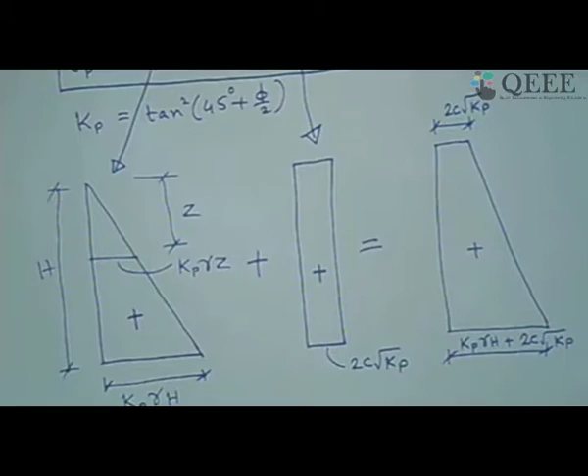Now let us come back and look at the slide. What I have already explained is the variation of Pp with respect to depth, and the total passive pressure is half gamma Kp h square when there is no surcharge and no cohesion present. I have also completed the case for soils which have both C and Phi, where cohesion is also present.

Now what happens if there is a uniform surcharge acting on the ground surface? Let us say Q is the uniform surcharge load acting uniformly distributed on the ground surface. In that case, that Q will get added to your value of sigma V.

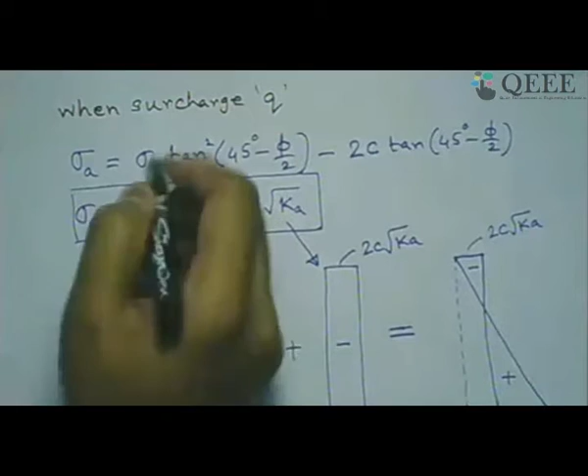So whatever we have done for the active state, let us go back again. When surcharge Q is present, using this different color, the sigma A will be Ka times gamma Z, plus Q. So our sigma V at any depth will be gamma Z plus Q. That's why Ka times gamma Z plus Q is the expression.

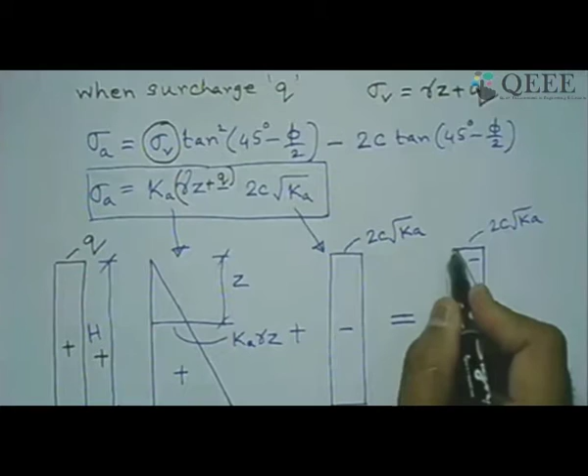So if surcharge is present, I have to add one more portion here, of intensity Q, so that one can understand the distribution of Q. This is also a constant and it is positive, as we can see from this expression. Depending on the value of Q, whether this is positive or negative needs to be checked. So this portion Q needs to get added for the active state.

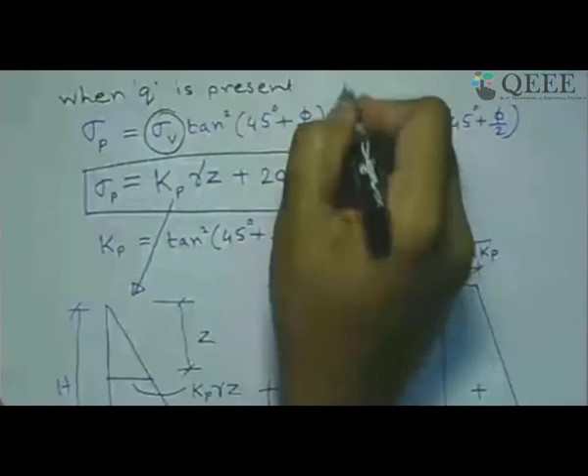Then for the passive state, what will be the change? Let us go back to the passive case. If surcharge is present for the passive case, the same thing will happen. When Q is present, the sigma V again changes to, at any depth, gamma Z plus Q. So this becomes Kp times gamma Z plus Q.

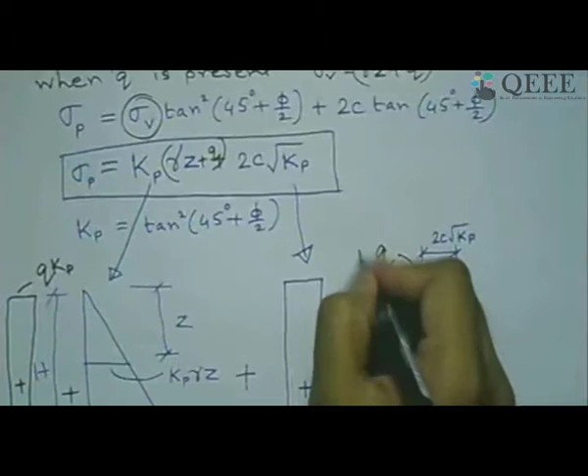So here we need to add one more component if surcharge is present, which is uniformly distributed as Q, and you get the total passive pressure with an additional term of Q. So Q times Kp will come over here, because in this equation Q times Kp is occurring. So Q times Kp will get added to the earth pressure component in the passive state.

Whereas in the active state, we have already seen that Q times Ka gets added, as we saw in that equation. So this Q times Ka should get added to the active state of earth pressure.

Now let us look at the slide again. If surcharge Q is acting, this Q times Ka gets added to the earth pressure. It also considers the case where our soil is not dry, where it is a submerged soil with a water table existing at a depth of h1 from the top of the ground surface. In that case, what will happen?

This is your submerged portion, this is your moist portion. You have to consider, for calculation of any earth pressure theory, not the saturated gamma value but the gamma effective value or gamma submerged value. Why is this so? Because gamma submerged or gamma effective is the component due to the earth, and the remaining pressure is due to the water.

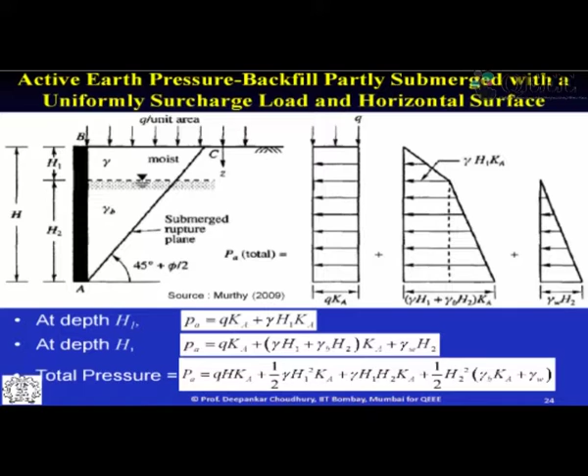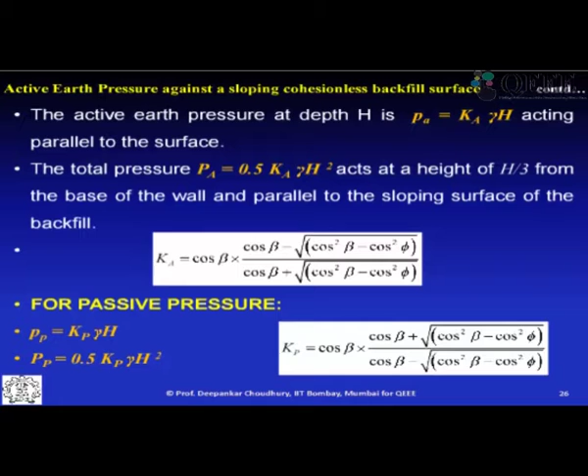So with this, today we will cover this portion, which I have already covered, so I can just show you the slides again. That means for a C-phi soil, that is when cohesion is also present, we have seen from the classical relation of two principal stress condition how the expression for active earth pressure is defined, and that will give us the concept of depth of tensile crack. What is now tensile crack? Let us give a brief today, and tomorrow we will discuss it further.

When surcharge is not there, in this case you can see over here, when surcharge is not there, then when C-phi soil is present, this component is negative. So at the ground surface, when there is no pressure, this negative pressure is acting, and that negative pressure will continue up to a certain depth until this portion compensates its value and makes it zero. So up to a certain depth, this depth which we call Z critical, is the depth of tension crack, because you can easily expect that soil cannot take tension, and this is the negative stress.

So this portion of the soil or this depth of the soil will be under tension. So this depth ZC is called depth of tension crack. Now if you want to try to find the equivalence of the area of this negative pressure with the equivalence of the positive pressure on this side, you will also get another value equal to ZC. So 2 times ZC we call HC, which is known as critical height of vertical cut. What does it mean?

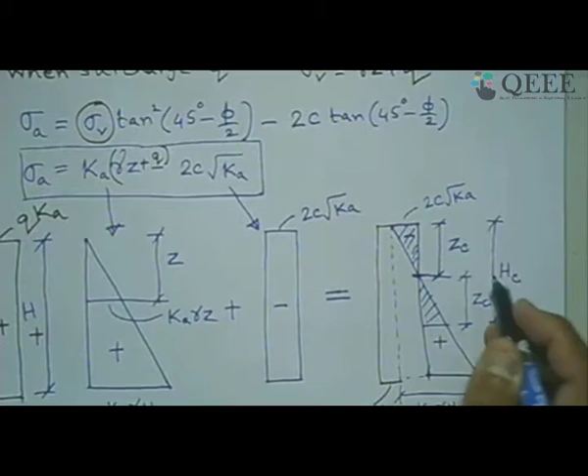That means if you go up to this depth and cut the soil vertically, it will be stable because negative pressure coming laterally from the soil is tensile in nature, creating a tensile crack, and soil cannot take tension. That equal and opposite negative tension can be compensated with positive pressure up to a certain depth. So 2ZC is essentially the depth up to which theoretically one can go for a vertical cut without any support or retaining wall design, because this positive soil pressure gets nullified or balanced with the negative soil pressure. But in reality it is not so, we will discuss that in tomorrow's lecture.

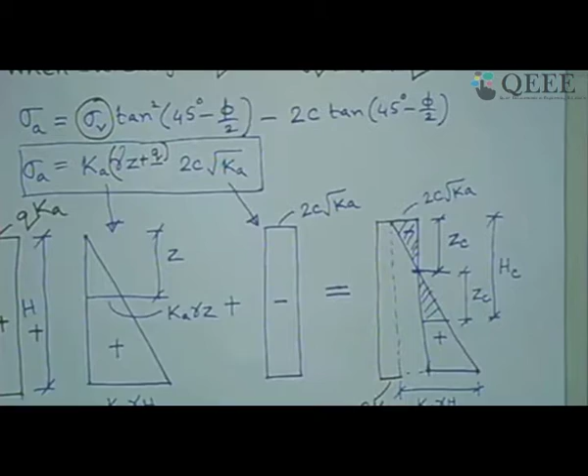Now the second question was how to calculate the depth of tensile crack - is there any derivation? Yes. So today, though I have stopped here, in tomorrow's lecture I am going to continue from this point and definitely derive the expression for tensile crack. But you can see from the simple diagram that ZC is nothing but our depth of tensile crack. Once you know the value of Ka, and 2C, you can easily find out this depth of tensile crack. So this is easily derivable from today's discussion, and tomorrow I will continue from this point.

As you are asking again, I said today we left it there itself. I have shown through this diagram, once again let me put it here. Please look here, this is at ground level. You have a negative pressure of 2C root Ka. So the depth up to which it becomes zero, that is our depth of tensile crack, ZC. From the value of Ka you can automatically find the value of ZC up to which depth it occurs, where that Pa becomes zero - you can see from the slide also. This depth of tensile crack, 2C by gamma root Ka, gives us the value of Pa equals zero, and that gives us the critical depth of tensile crack ZC.

From tomorrow we will start discussing this further, because this is the theoretical value. In practice we hardly get this depth of whatever we have derived here today - these are just theoretical or mathematical expressions. We will see the proper realistic expression as given by Terzaghi in tomorrow's lecture.